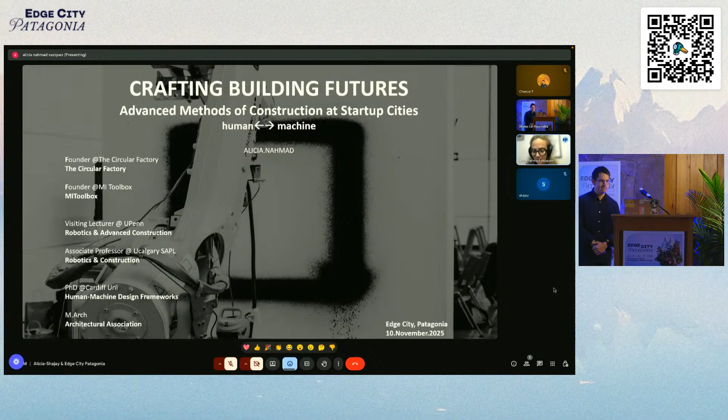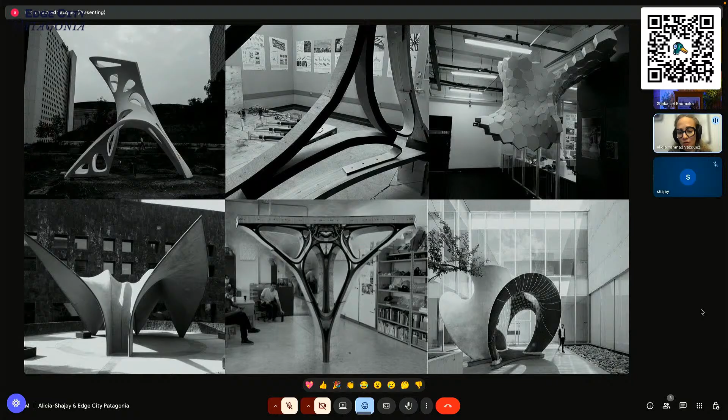Within that context, we built a lot of physical prototypes in Mexico City, but also in Brazil and other countries, currently in Canada. And I started to look into robotic arms.

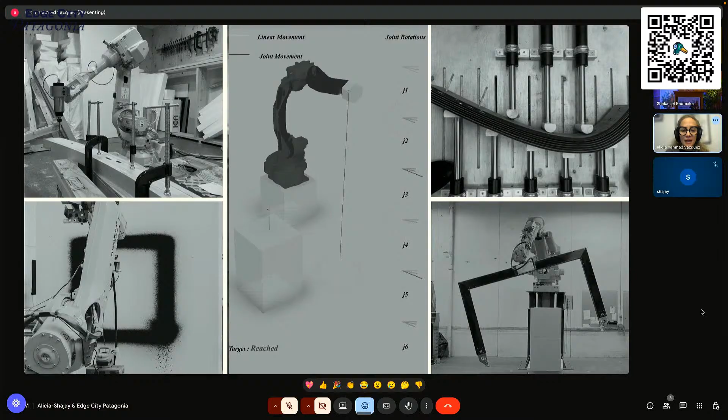I'm a self-trained roboticist, working with robots for the last 15 years, because I realized there was a gap in how we can translate complex, inspiring geometry - beyond just straightforward forms - into real life. There is a lack or missing point between physical and digital, and how we can translate the digital so it can be understandable by humans in physical space. That's when I started to work with robots and robotics.

A lot of the inspiration behind what we're doing is seeing how other industries, like the car industry, change aesthetically - how things look is more related to new looks, modern technologies, and how they are built. Whereas in the built environment, we are just really simplifying a lot. Things look more boring or less interesting than they used to, when actually we know it was as expensive to build before as it is to build now. So what is going on, and how can we close this gap?

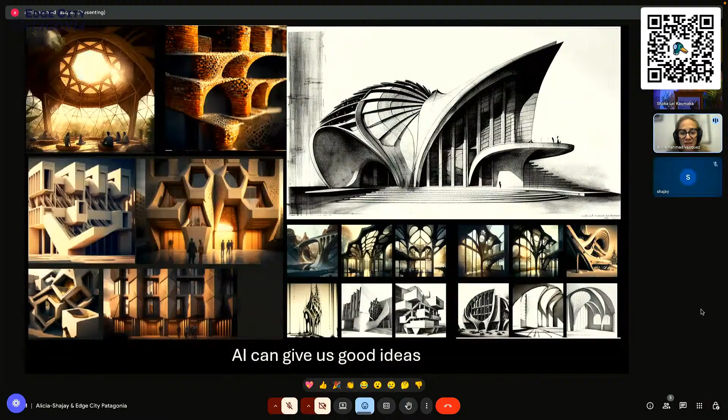We know that AI gives us a lot of great ideas. A lot of AI designs are super inspiring and really nice, but how can we build them, and how can we actually make them happen, especially in decentralized ways?

Our interest in robots is because technology has become a lot more accessible. Robot arms are tools with a very low entry point, but also very flexible - almost like our hand. Whatever tool you can touch with your arm, a robot will be able to do it. As a machine to start in a decentralized way, it's really effective because with the same machine, you can do multiple processes.

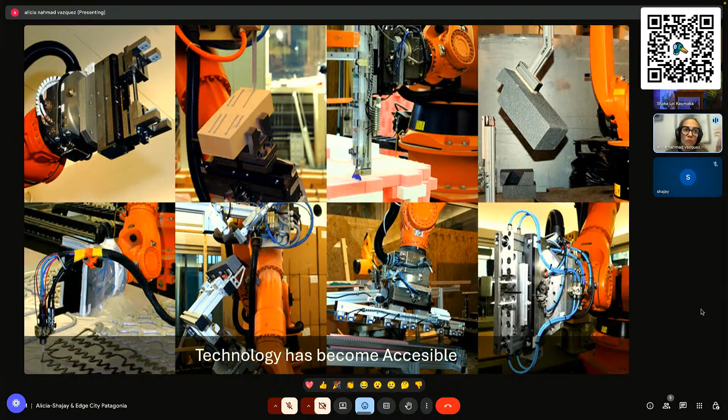That was where really it started to attract us, to say how can we have a manufacturing production based mostly in robot arms as opposed to larger machines. We know that the construction industry for a long time has been looking at DFMA, design for manufacturing and assembly, a paradigm that emerged in the 80s as the future of construction, or something we still consider the future of construction.

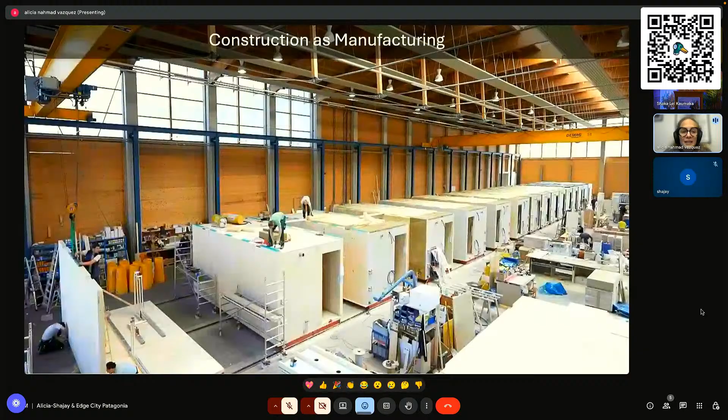In the DFMA paradigm, we are building inside large factories in which buildings are manufactured in series and then transported on site to different sites. However, this represents many challenges.

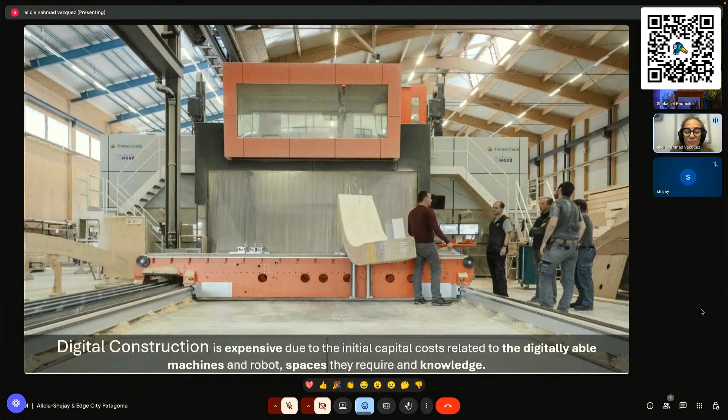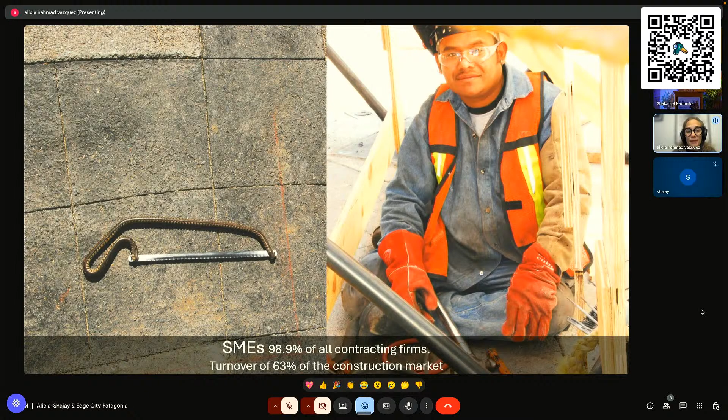Mainly the challenges that we need these large machines that require very large spaces, production facilities that are not like how construction normally works, also require large capital investment. The skills for a person to work in manufacturing are very different from the skills for a person that works in construction, which means construction skills are getting lost, and we're trying to find people that work in a totally different space. So the SMEs, all the traditional crafts, all the traditional construction skills get lost in the translation, while our buildings also lose a lot of what makes them unique and custom.

So we started to work on this paradigm and say, how can we move into a paradigm of design for robot factoring, where we can have flexible robotic cells that can robot factor high quality products in a more human compatible, decentralized way. That's how we started to work in this area.

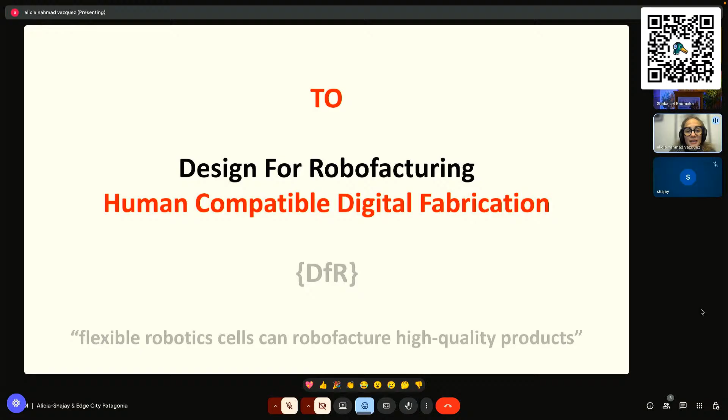How we started to get really interested in seeing, okay, do we have these big machines, can we actually bring them on site? Can we bring them near site in a more decentralized cell that could exist outside the large idea of the factory? And actually, when we think about it, buildings are not normally transported around the same way that cars are.

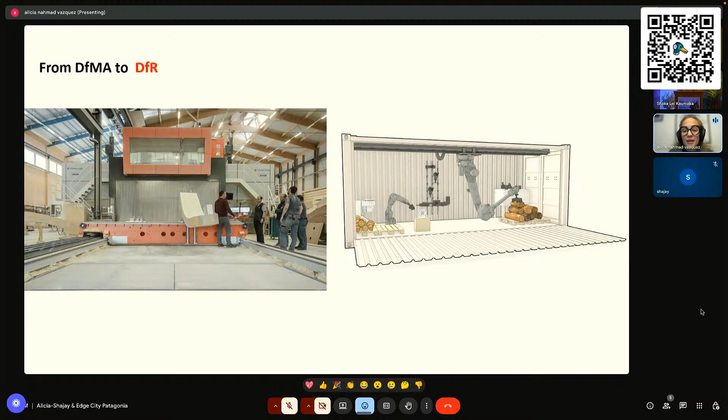Buildings are built where they are, right? So can these factories be near site where they're being produced, and also where maybe the skill sets are, the carpenters, the architects, the engineers, but also the tradespeople, and also the materials.

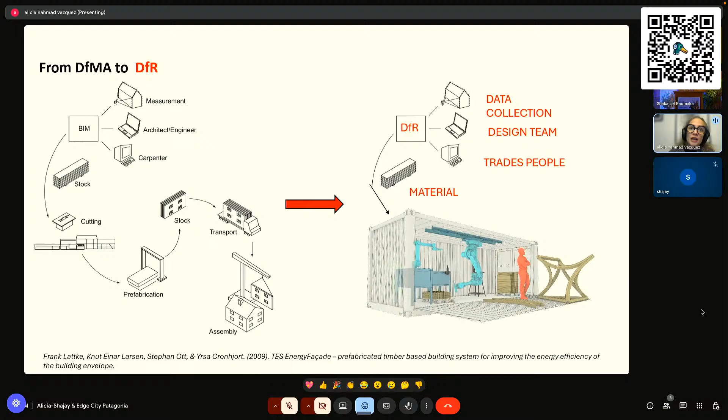When we think about prefabricated design on factories, we require very established centralized supply chains that require just-in-time manufacturing, whereas normal construction will use materials that are on site, whatever you find, whatever species, whatever product. So how can we bring the advantages of digital fabrication, of precision manufacturing to our on-site context, and of course engage with local economies and local trades?

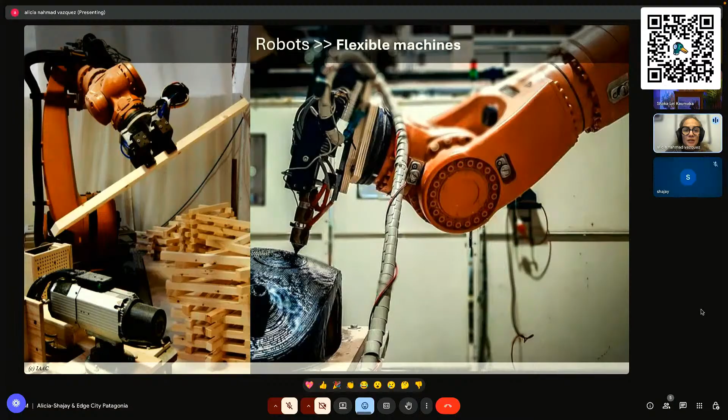We started to work on this project more than 10 years ago, and of course the centralized idea is using robots as a flexible machine that could bring everything together. We also developed these cyber-physical platforms, trying to think about how design for robofacturing should also be able to engage with user choice.

So for example, this is some of the initial tests we did for a simple facade. How can we make it into an environment where there are many choices, where it could be customized, but also where the user can be receiving feedback on energy, radiation, sky view, exposure, material use, material cost, manufacturing times, the same as when you buy something on the supermarket, you can see the nutritional contents.

So can we see the label of the structure of our design decisions? How much do they actually cost in materials, in manufacturing, in time, and also energy, mass, etc.

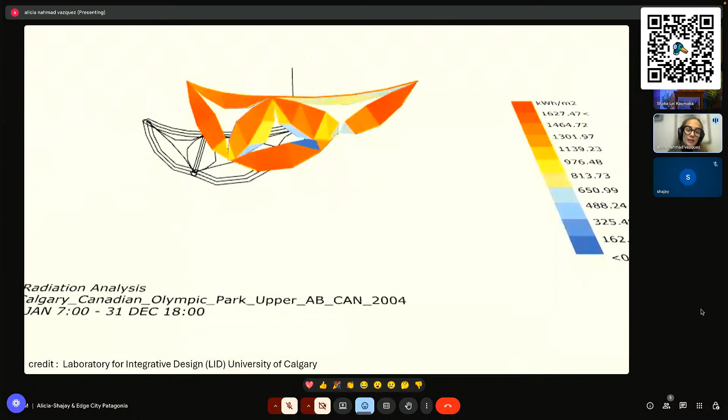Of course, we develop all the backend for this platform where all the calculations get made, to be communicated in real time as the user makes choices. So we started to develop these kinds of platforms that could enable more transparency between the stakeholders and a more participatory way into how things are designed, decisions made by customers, by investors, by stakeholders, and also brought to the production floor into the microfactory.

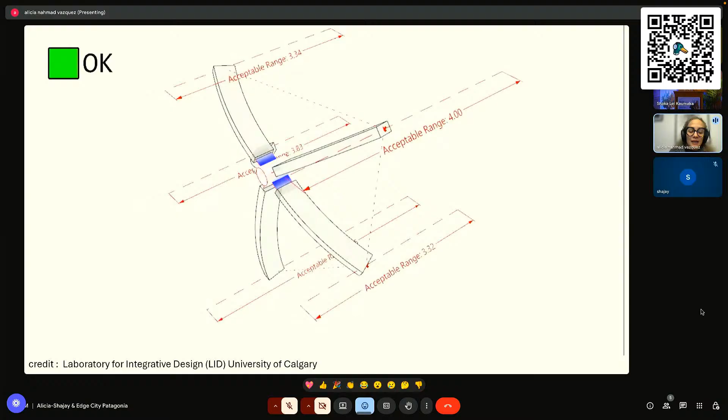And then this is some prototypes built using this platform. We also looked at machine learning, into how we can start to understand materials that may be heterogeneous, how to use these platforms to understand where there are knots, where the wood has imperfections, especially when looking at local supply chains where materials may not be as processed or advanced as more established production lines. So how can we set our templates, how can we produce things to be sure that we don't have inconsistencies, any milling problems, any manufacturing problems.

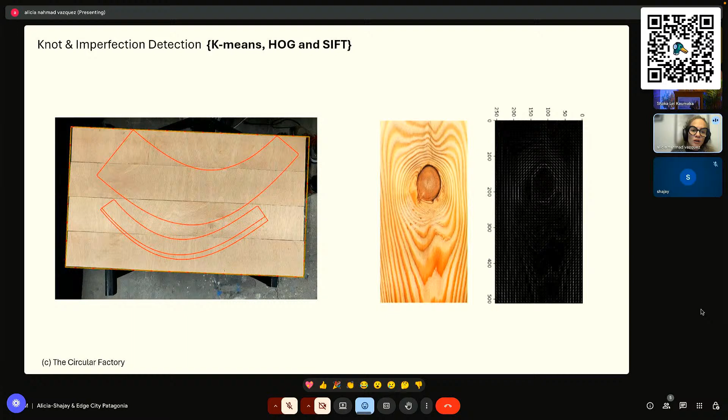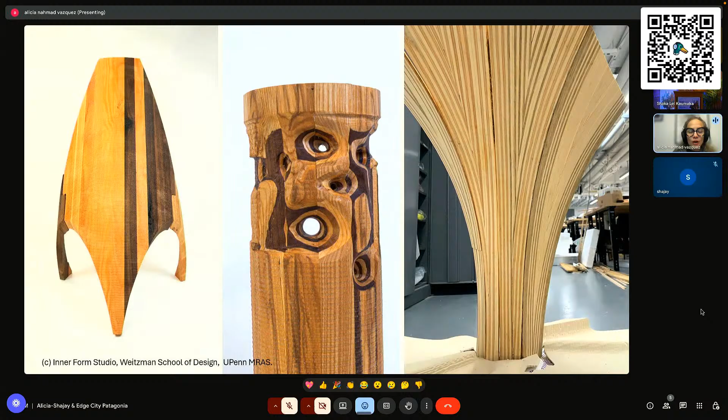So we're also using that to train our own neural nets to know how to mill when material is not so perfect, or when we're adapting to local materials. These are some of those ideas of using different materials, and also using these tools for milling and producing high ambition, sophisticated architecture.

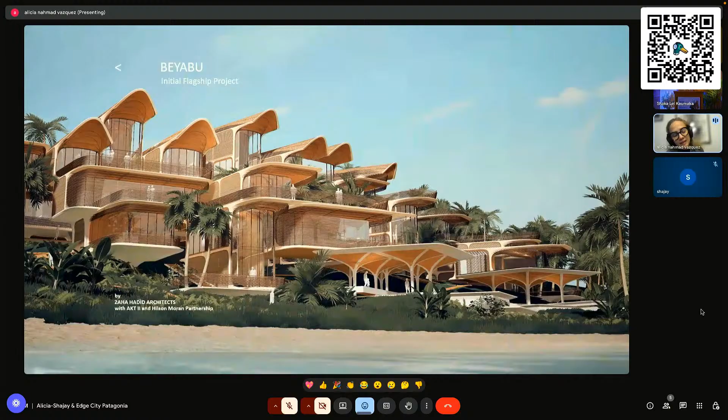So the idea was to leverage technology to create a sophisticated, dynamic, and customizable process, and also use technology as a tool of social innovation to bring manufacturing and production skills into local trades and local workers. The beginnings of Circular Factory was based on the Beyabu project by Zaha Hadid Architects, which is going to be built in Prospera.

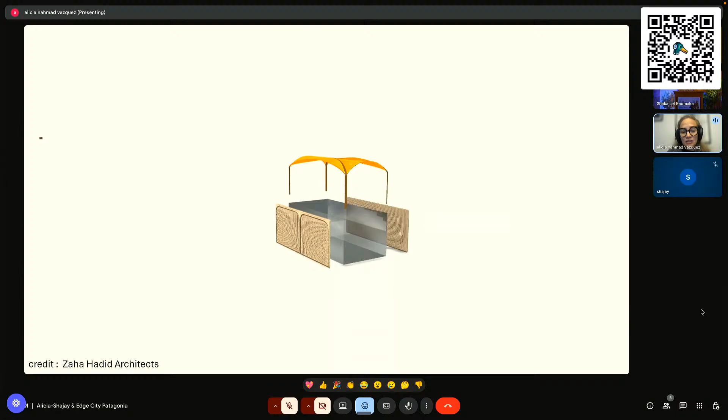Some of the characteristics of this project, other than being really beautiful, is that it enables a large amount of customization - every user can customize their unit. And this, being designed by Zaha Hadid, has really custom shapes that are inspirational, but also very ambitious and really complex to produce.

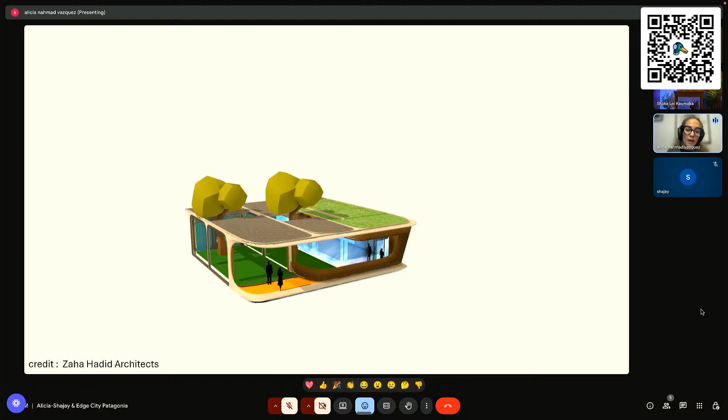So we designed the Circular Factory with the idea of having a flexible unit that could create all of these different pieces in a customizable, flexible way without requiring high investment or more machines, but being able to have everything in a consolidated and compact footprint. This is the ginormous and really exciting kit of parts that the project has for the different customers and buyers.

Based on that, we started to set up with a local certified forest, really looking at the raw materials we find, and with all the international experience and detailed information we bring, establish this micro factory to create a kit of parts and to nearshore the fabrication.

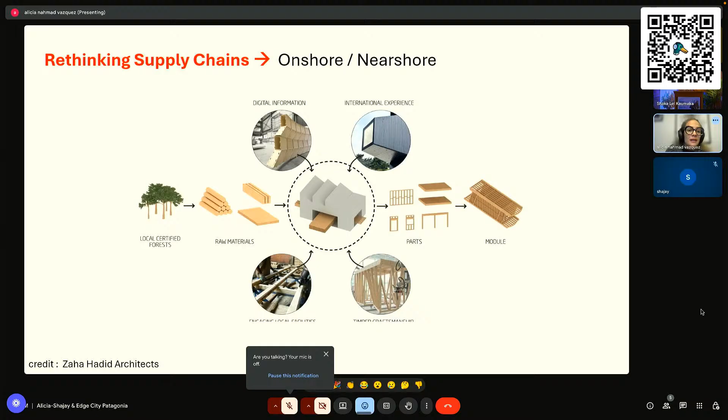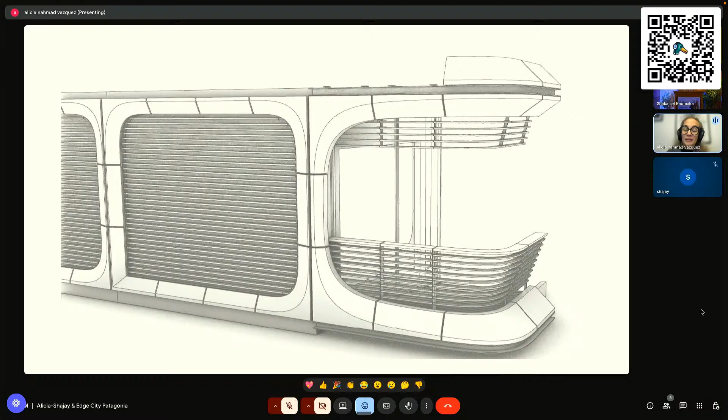We looked at the project and started considering different factors - existing cranes, telehandlers on site, not only fabrication but all the existing tools already there. We know we don't have access to high cranes, so we made all the sizes and dimensions of the pieces adapted to the local economy where they're produced, so they could also be moved on site. So from the mega factory to the micro factory on site or near site.

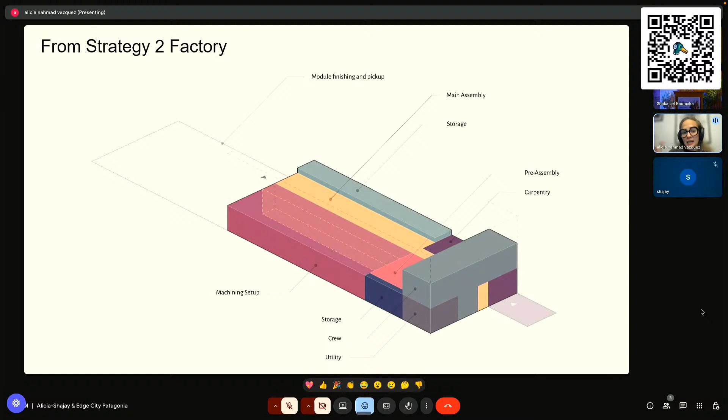So we designed this factory with a really compact footprint. If any of you have been to Prospera, you've seen it - where we have all the machines, the storage, the carpentry areas, and the module finishing, pickup, and main assembly.

The core of the factory are 2 robot arms on a track, which enable us to produce large beams and also smaller sizes, everything based not on the dimensions of the factory, but on what could be transported on site with the local telehandlers, which are basically small machines - they cannot carry more than 2 tons. So we know we cannot have any component heavier than that, compared to larger factories.

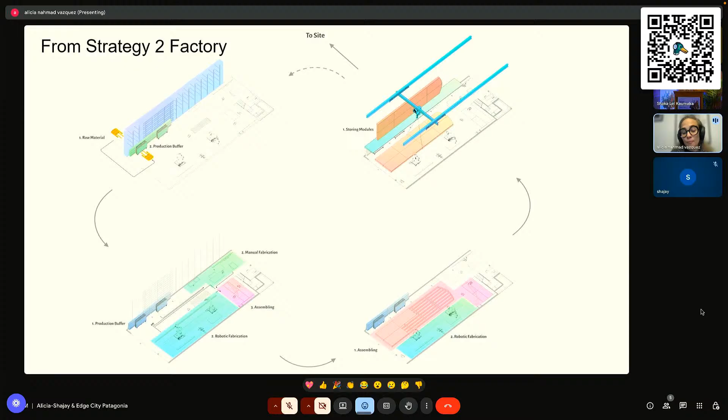We also have scanning and machine learning to understand the deviations between the digital and physical pieces. All of our wood is sourced on site or near site - all of it is Honduran timber - and we keep all of our staff updated with their simulation files and all of the different processes.

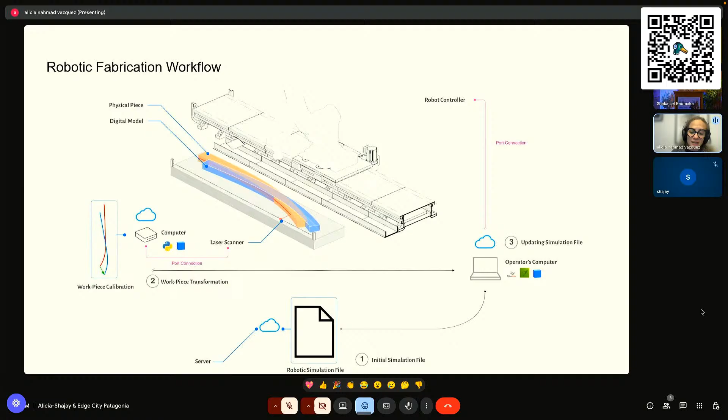So we developed this digital workflow that goes from design, to management, to fabrication. Everything is transparent - the idea is that every stakeholder can access the platform, see what's going on, and see the different processes happening throughout production, as well as all of our factory staff.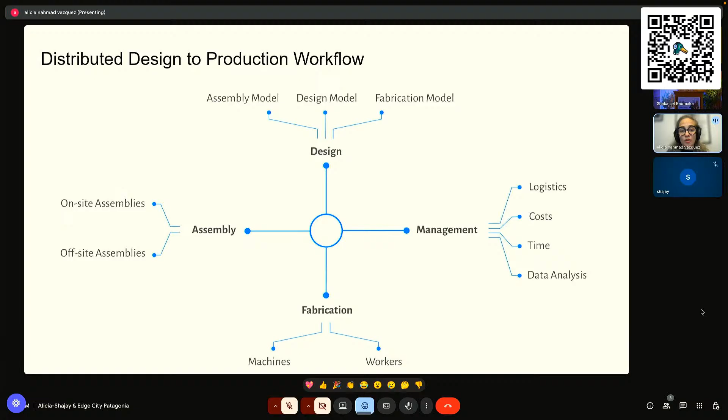Everything, all the machines, are linked together and integrated in the software platform. From the early design, everything gets transferred into the microfactory. Our staff have tablets where they can access what they are going to pre-produce. If there are any errors or mistakes on the files, we can constantly update and look at what is going on. That's how we started from this design.

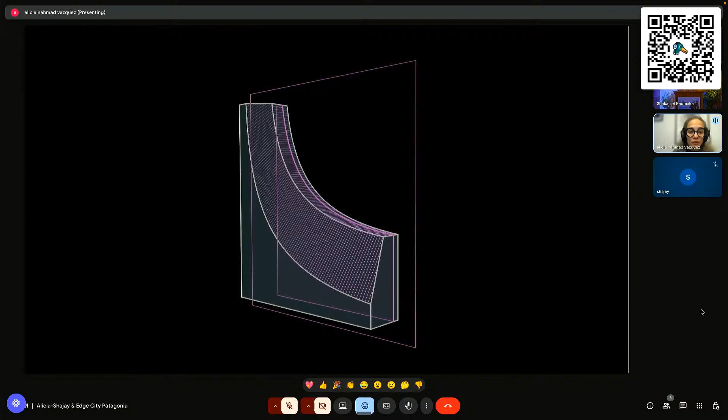This is the design from the architects, for example the mesh that we received. Now through our digital platform, we divide these into pieces that could be transported on site or made on site. Each of these pieces has a different fabrication process depending on the grain direction, what kind of wood is used, and how the lamination will be done. This project uses timber, a local timber, and each piece has a different fabrication process.

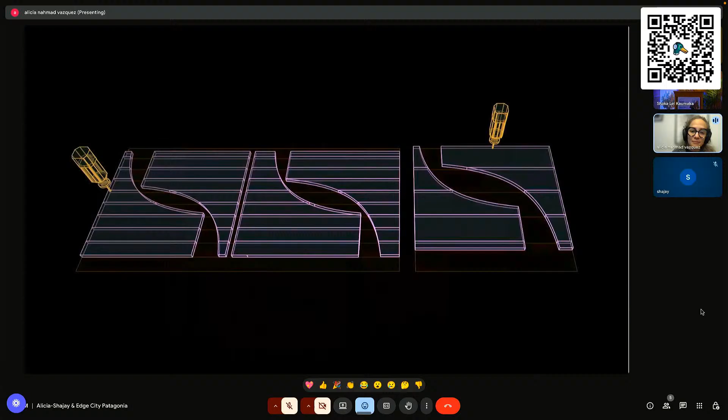In this case, they first get cut on a CNC machine, a numerical machine. Then they get cut, laminated, and assembled again, and finally milled with the robot arms. So each piece has its own process, and all of this is controlled throughout the platform as it gets updated and as the process gets fabricated.

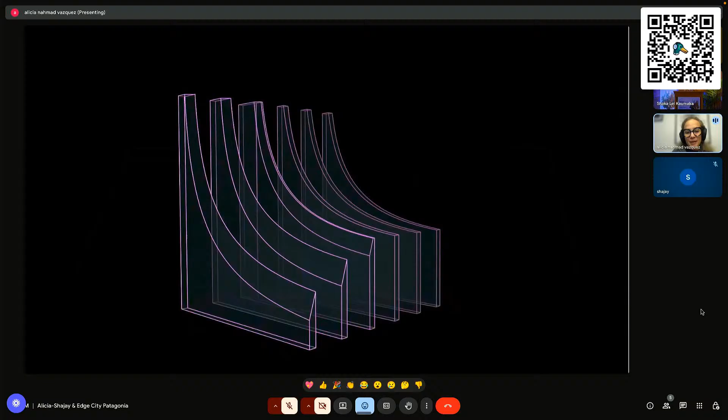Here is the second lamination process before the final robotic milling to get that shape, while also looking for material efficiencies, material saving, and the best nesting process for each of these complex geometry pieces.

The platform has all the different machines that we have on the shop, so all of our different stations where the personnel and management can access to see what is the bill of materials, what stock they need, how much they need, what they're going to be producing today, and we can constantly update on what has been produced, where there were errors, and where things are being changed.

For example, we can also access a bill of materials from very early on, to see where that piece is, where on the project it goes, to which unit it corresponds, and what are the different materials—not only wood but also adhesive, brackets, dowels—and then the different processes.

We know that this piece will require work from the planer, the jointer, then lamination, and not only machine time but also human time and unsupervised time, which corresponds to gluing or whenever it is drying, and wherever there are errors in the process.

So we developed this platform with an aim of flexibility and also of providing maximum transparency throughout the fabrication process for every single piece, across all of our different machines on the microfactory, where you can see where the piece is in the process, whether it is finished, how much is missing, where there were any errors, and what the different schedules are. So that's our digital platform.

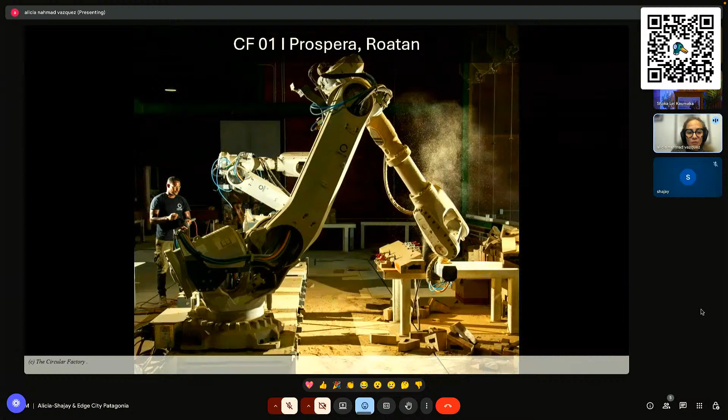And this is how the physical factory is in Roatan. We have the two robot arms—that's Jaime, one of our master carpenters—and also the two CNC machines, a planer, a jointer, and all of the other more traditional carpentry machines that you will find.

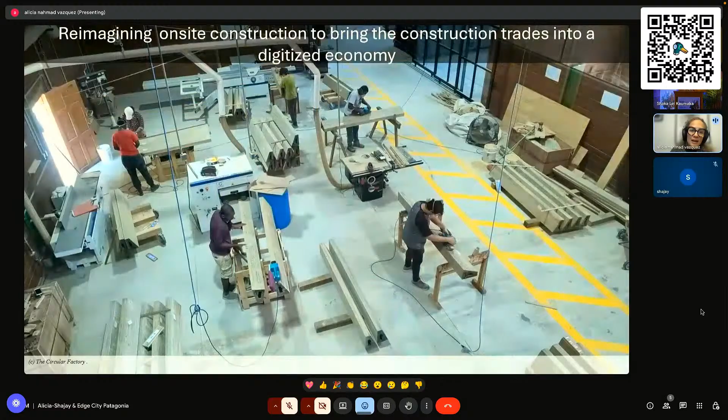Right now we have upskilled more than 22 local workers who have become aware of how to use robotics and digital processes, potentially bringing all the trades into this digitized economy, making them active participants of digital tools and digital processes, and excited about what they are doing.

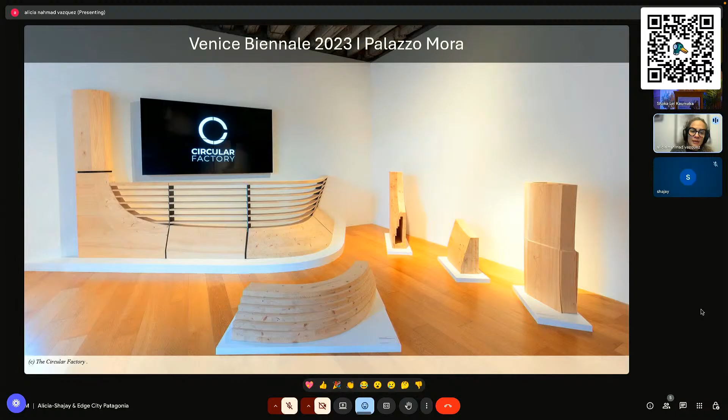We fabricated part of that Beyabu project for the Venice Biennale in 2023, which was exhibited there at the Palazzo Mora. And these are the pieces right now at the Zaha Hadid Gallery in London exhibited.

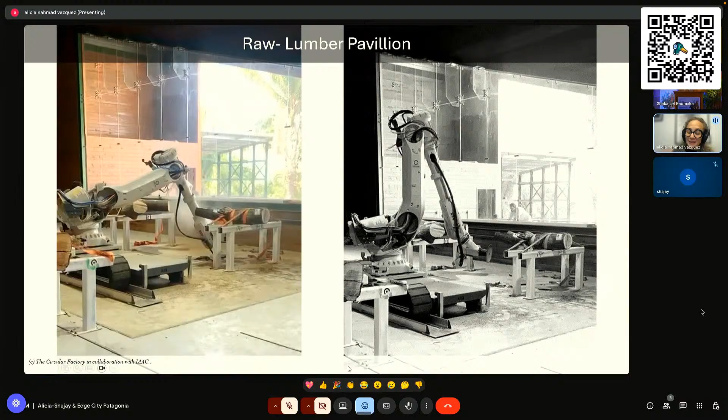We also have used the same setup to look at raw material, like raw lumber, for example in this pavilion. Using the same setup and the same digital platform, we tried to go one layer deeper to look at the local lumber—how can the local lumber be used without any pre-processing being done?

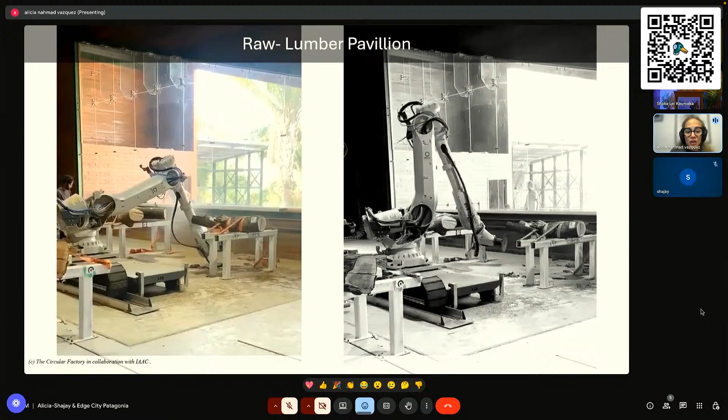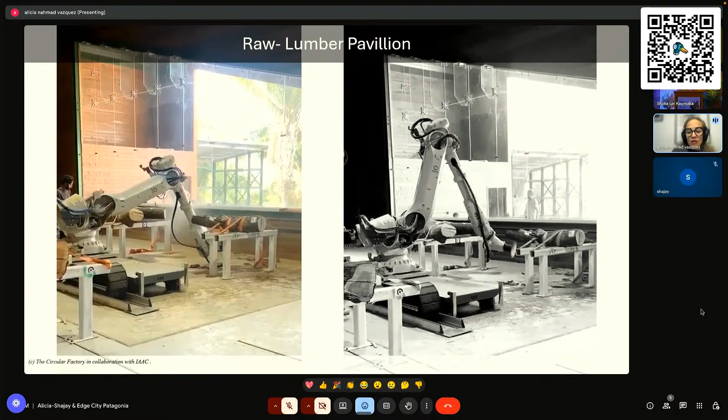So we actually scanned the logs and then used them to process with the same robot, which in this case has a circular blade as well as the milling spindle—same machine, a lot of different processes. This was a raw lumber pavilion that is also outside the Vita building in Prospera. Here you can see this all using logs.

Also, like this on the Duna Tower, we fabricated all the louvers for the tower.

With the same setup, you can see the same platform, but a different project. So really the main ambition was this flexibility, not only a single process.

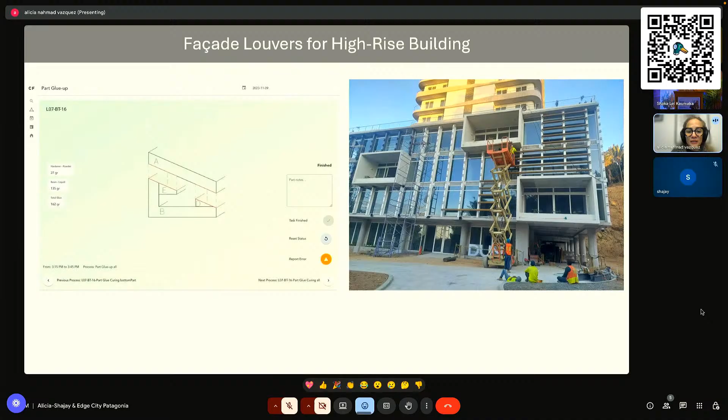Right now we are doing these Tierra Zen cabins. We have fabricated one. They are glamping cabins, going to be on the Veta Village—single 50 square meter dwellings with one bedroom, bathroom, a little study nook, and a kitchen. They are all done in local, raw timber.

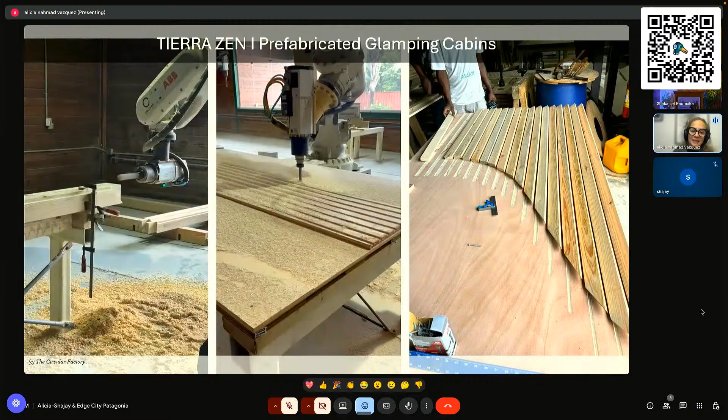Again, similar to before, the facade is all louvers that start to open up to show the different processes. Here the robot is milling not only the internal frames—everything is frames—but also all of the exterior pieces that create the facade.

So these are the glamping cabins, and these are all the different frame panels. Everything is a timber system assembled on site. As I mentioned, these are the machines that we have there.

All got assembled on site, prefabricated. It all fits in a single container, so it's transported to the site. This is near the beach, near the Pristine Bay.

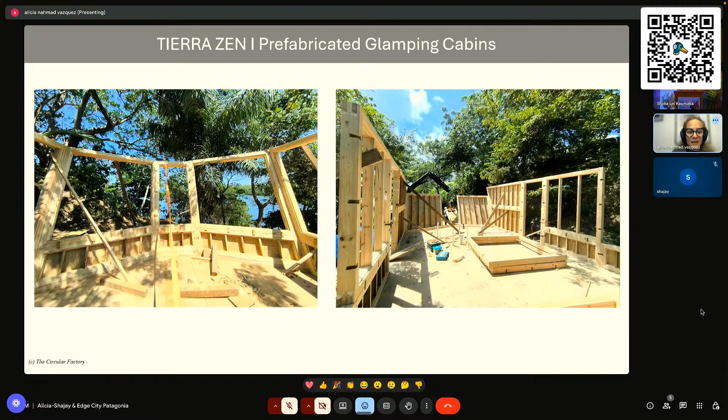And then this is the finalized cabin that we are doing now. So the setup on the factory is now into these. These are some photos of the interiors of the Tierra Zen cabins.

Basically, the idea is to create this decentralized, distributed, democratic fabrication through a flexible and adaptable microfactory with software that enables stakeholder participation, and also micro-credentialing, upskilling, and training the locals. Yeah, thank you very much.

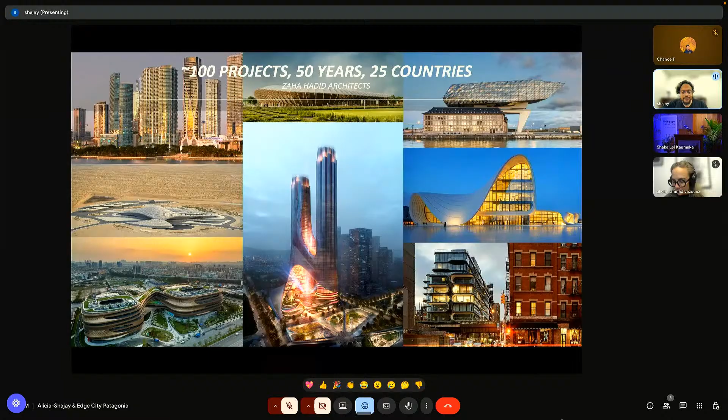So I work for the design research team, which I co-founded almost 20 years ago at Zaha Hadid Architects. The company is obviously known for these more high-tech buildings globally, and it's about 50 years old, but we have operated in every possible economy as it was emerging—whether it's the Middle East, China, or now India and so on.

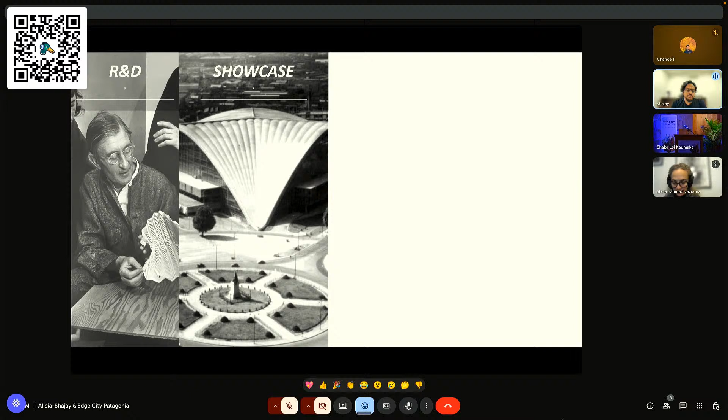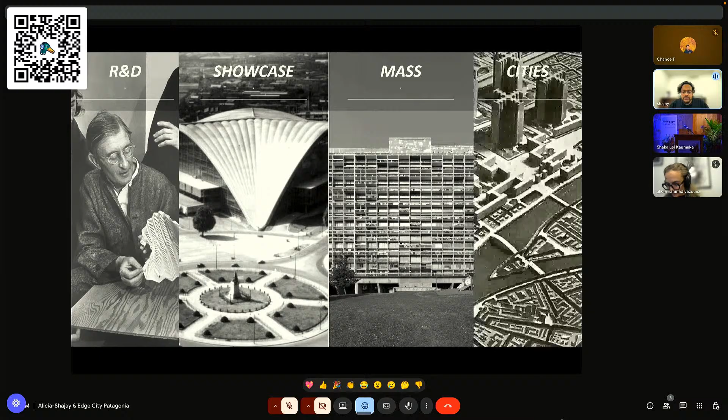So in that sense, we have been following in the footsteps of the Bauhaus. That's what I'm going to talk about—not the architecture of the company, but the efforts in scaling up design-led ideas. Bauhaus was a short-lived but deeply impactful art and architecture movement between the two wars, where they explored new forms of knowledge and making, to postulate a new architecture on that basis, which led to a prolific number of new buildings being built after the Second World War, especially in Europe and North America, and which then led to deep impact on our everyday buildings—so-called commodity buildings—globally, and how 20th century cities took shape.

So we want to follow in a similar footstep, but not repeat the mistakes of the 20th century—to learn from the positive things they did, which was focus on research and development and demonstration, and then later help percolate those innovations and technologies deeper into the industry and into everyday buildings and cities. As many of you know, venture capital in the architecture industry is almost non-existent.

So all innovation is in a way funded by these kind of iconic projects. That's not only true for the 20th century, but also historically, cathedrals were the engines of innovation in Renaissance Europe, and similarly temples and other religious buildings in other parts of the world.

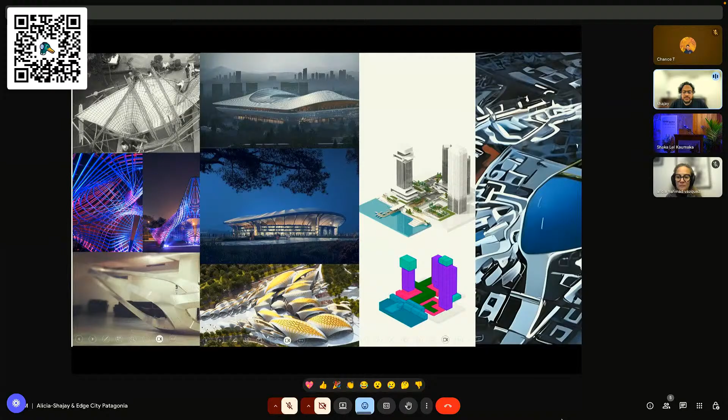So all of this, in the last 50 years, we've been exploring technological counterparts to this architectural and urban ambition. And we have seen 4 specific kinds of episodes. One relates to computational geometry, how we can digitally design shapes on the computer, and how we can then produce them physically using digital means.

And later we've been looking at so-called video games, or game theoretic games, for consensus building among stakeholders, which we are now also investigating how that leads further on to so-called AI for new cities. So today I'm going to talk only about point 3, which is use of games for consensus building, or participatory architecture and participatory design.

But just a bit of a precursor - why are we interested in cities? As an architect, as a designer, as an urbanist, it's deeply rewarding to see that the outcome of our profession can really help civilizations blossom and deeply impact all the citizens of the world.

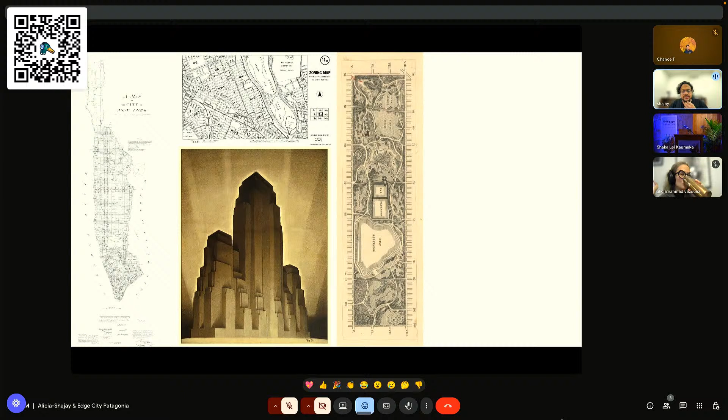And then most importantly, they designed these kinds of templates for building types, whether it's skyscrapers or the 6 or 7 residential building types that they had pre-approved, which are now dotted all over New York. And so the gridiron system of New York also makes real estate development really, really easy.

Because the plots are fungible, these designs are equally applicable on the east side or the west side, because the plots are almost identical. So developers don't have to get new permissions every time. These were some of the reasons why New York really figured it out, and these integrations between urban planning, urban design, and architectural design led to a lot of prosperity in a short time.

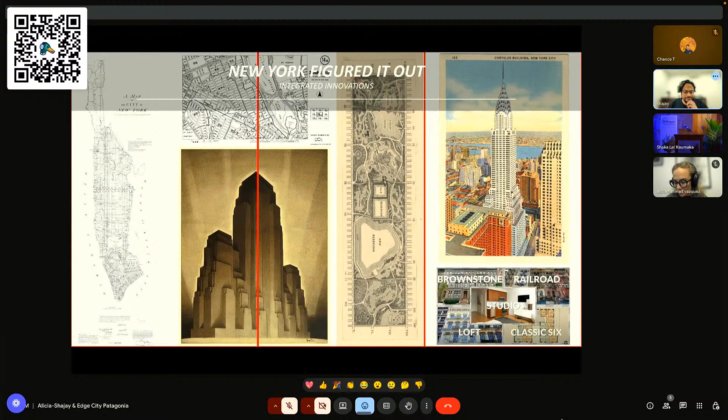So that's what we think - cities are a more recent architectural invention, cities that grow that rapidly. And since then, the US has not tried it again, but China has definitely copied a lot of successes from the United States, leading to over 100 cities in a matter of 50 years, between 1980 till now - Shenzhen being one of the most important examples of that.

And so this architectural invention, in a way, can deeply affect citizens of the world. Cities, as we know, cover only 1% of the surface area of the Earth, account for 80% of the wealth and 70% of the pollution and so on. So it is very challenging, and it can be deeply rewarding as well.

So that's why we are very motivated in this kind of integrated system development. So games for consensus falls under that, because we've been working collaboratively with architects and engineers and scientists and so on for the other aspects. But one of the things that deeply interests me is ideas of games, game theoretic setups for consensus building or incentive mechanisms and so on.

This was early on explored by Patrick Schumacher, who's a principal at Zaha Hadid Architects, in the year around 2000.

There was a postgraduate design student-led team called RAMTV that released a book called Negotiate My Boundary. Two things they spoke about in this book were deeply impactful to what Alicia and I tried since 2016. One aspect was online community building, well before Facebook or any such thing existed, when people figured out the internet could help bring communities together and find synergies between people and their interests, then potentially physically host them through technologies of mass customization like modular construction.

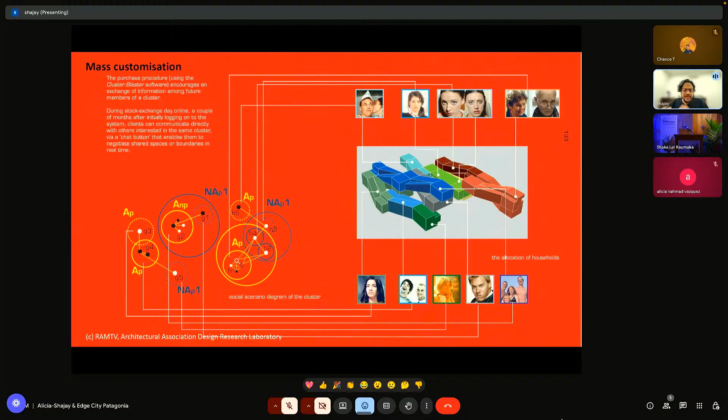So these two aspects, combining online community formation with corresponding physical hosting on land, were what Alicia and I picked up in our teaching activities at the Architectural Association in London since 2016, titled Constructing Social Agency.

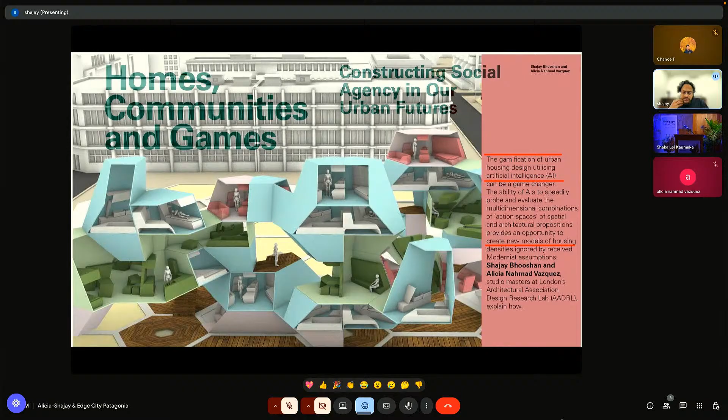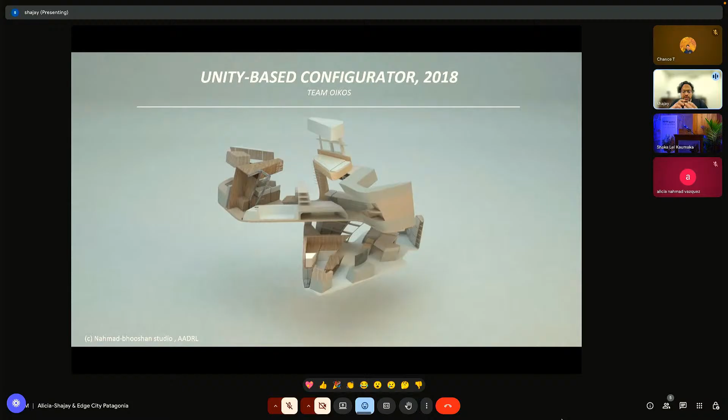We started leveraging emerging technologies of video games to help non-architects and non-designers visualize the possibilities of combinations of spaces, and how we can create communities and give them what they want, rather than them buying things and figuring out the building as built is not what they originally intended.

Since then, we've been thinking about these configurator systems for configuring spaces in a collaborative, community-led way.

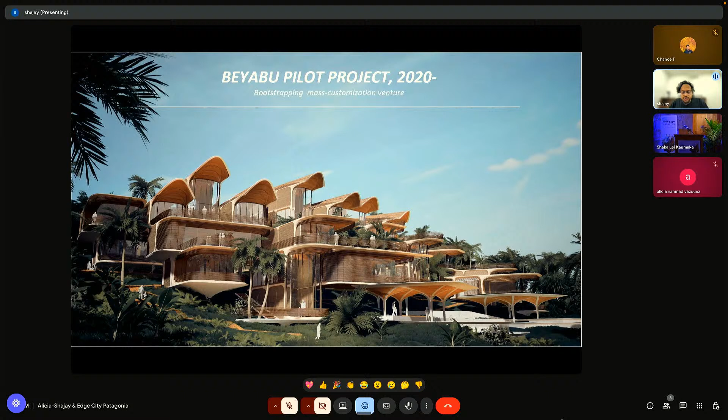This is the context in which we arrived at the Beyabu pilot project in Roatan, where we proposed as Zaha Hadid Architects this kind of modular design, but still customized to individual occupants. The red dot is the pilot cluster, but the intention was to demonstrate through that pilot cluster all these technologies, and if successfully demonstrated, we could plan out the rest of the development.

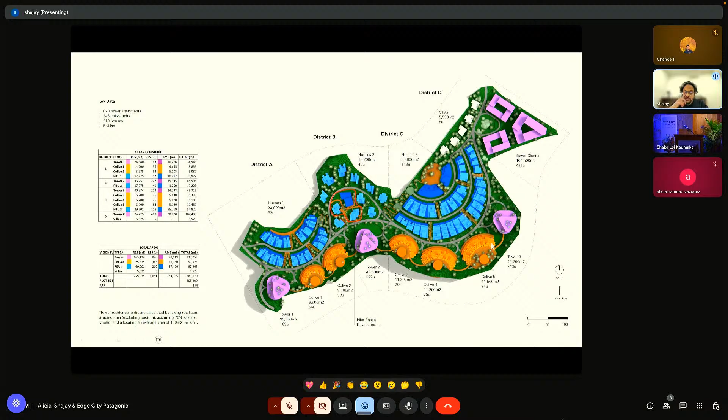We proposed two separate technologies in this online-to-on-land tech stack: one was the configurator, the other was Circular Factory. We built the configurator internal to ZHA, and Circular Factory was commissioned by the client, and Alicia has since taken it forward.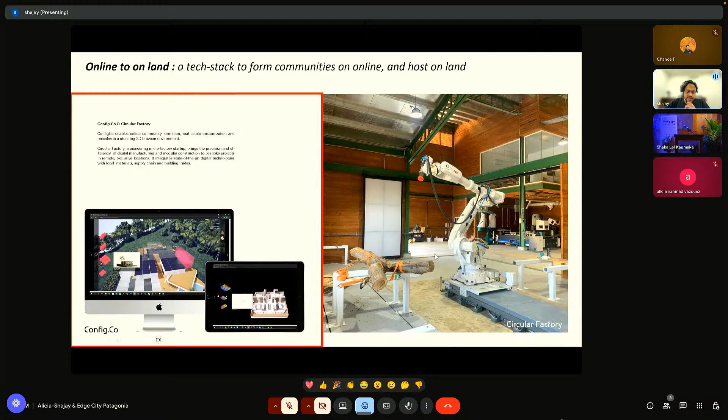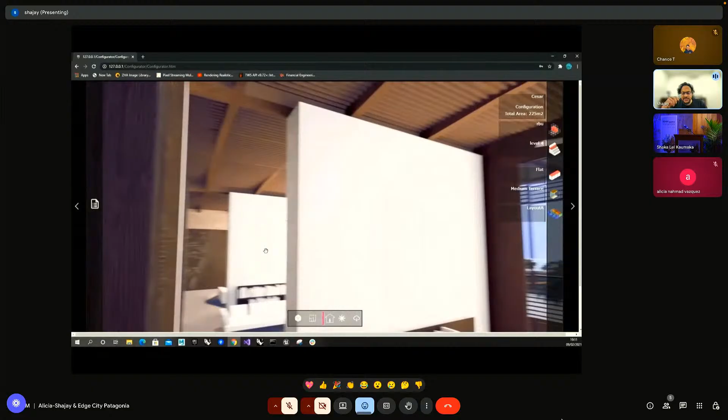On the configurator side, we built a game engine based configurator where people could log in on the browser, select their site, pieces of land in 3D, and later customize the interior layout of the building, like a 2-bedroom, 3-bedroom, or office space. They could also walk around in real time and see what they can see from inside their house, how much of the ocean they can see, who their neighbors are, and so on.

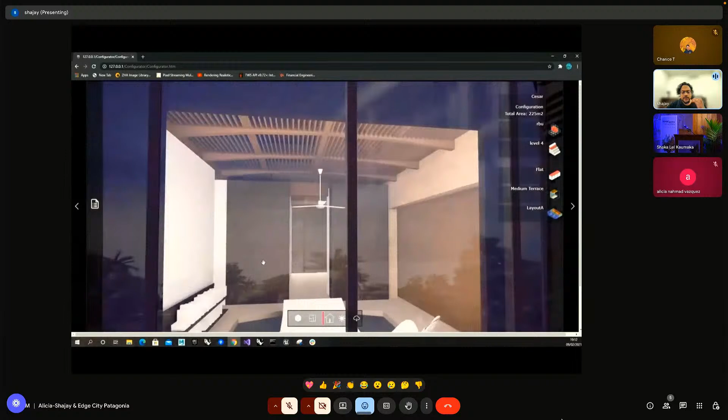This was very well received by non-architect buyers and eventual occupants of the building, and this was well before anything was built on site. Currently this has not been built, even though it has been designed and engineered to a great amount of detail.

Behind the scenes there were ideas of 3D rights, coming from Air Rights in New York but extended to 3D, where users only pick these pixels or 3D pixels, and we behind the scenes compute these design options. Based on their budget, users pick 3 pixels or 6 pixels or 3 corner pixels and half pixels on the outside, and so on, and we compute these spatial modules and combinations.

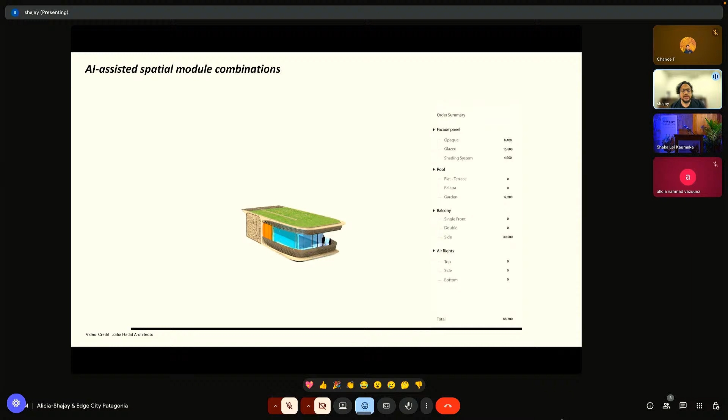This is enabled by a system of combinatorial possibilities. We designed and tested how these kit parts can be combined to create interest and variety, so it's not all cookie cutter the same, but at the same time it can benefit from economies of scale, similar to other modular construction. So it has the benefits of customization and the benefits of modularization.

Another benefit of this configurator was that we designed so many types, but most users only chose about 2 types. This meant it became a testing ground for which ones to take forward and detail further, which is what we did after this phase. When we did the configuration with about 16 buyers early on, we realized we only needed to detail further 2 more, and then we detailed the kit of parts accordingly to make sure those 2 types are delivered.

We also detailed how each of those parts can be converted from raw material to finished product, how much time it takes, how much machine time it takes, how much material resource it takes, and how it can be connected deeply with the technologies of Circular Factory and the skilled labor that they were training.

This kind of system integration also delivers a lot of economies. Usually modular buildings are designed as individual units and then stacked together, so there's a lot of redundancy and wastage. Because here we already know who the buyers are going to be and what arrangement they want, we can treat the entire aggregate as one building, optimizing structure, material consumption and energy consumption holistically.

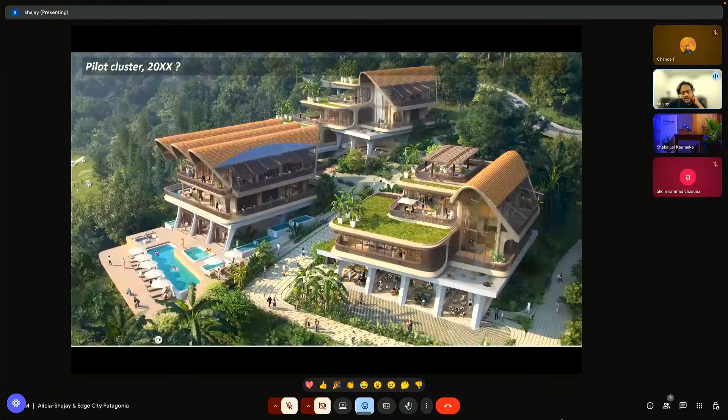This is where we are at. We want to demonstrate this pilot cluster. Hopefully there are enough buyers and funding, and if so, we can export this to other parts of the world, customizing it to local climate and other opportunities, material opportunities and skill opportunities.

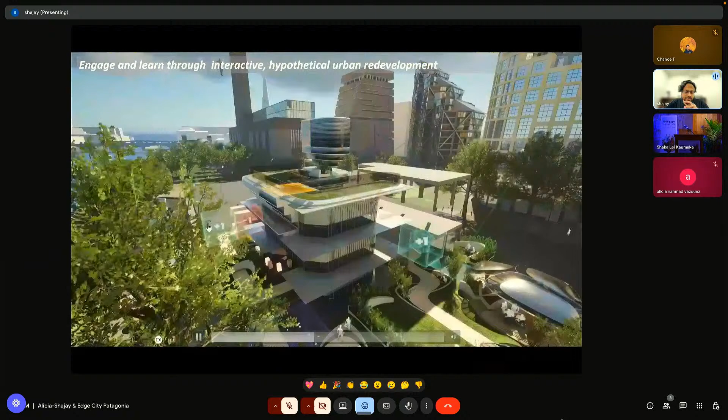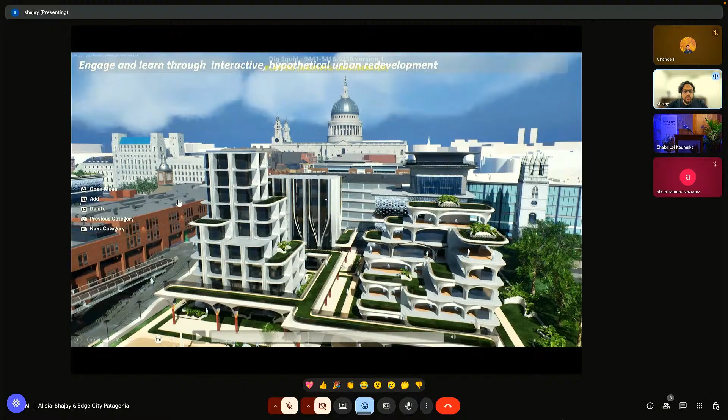We took this idea and extended it into a fun game for Fortnite last year, where we tried real-time configuration with kids as young as 7 years old. Everything built on screen was built by players as young as 7 and sometimes as old as 18, and within 3 to 5 minutes of playing they can create architecturally credible outcomes.

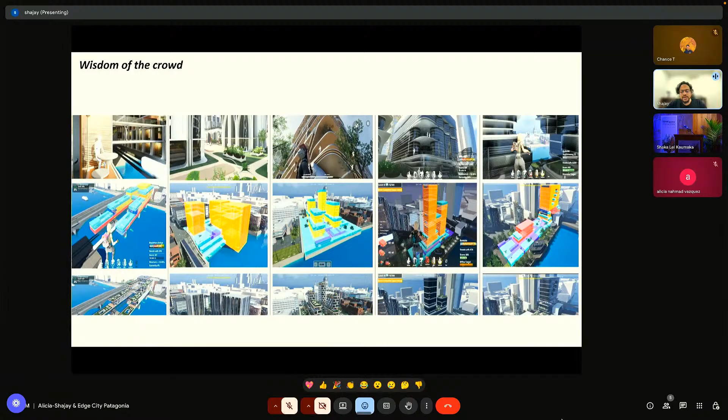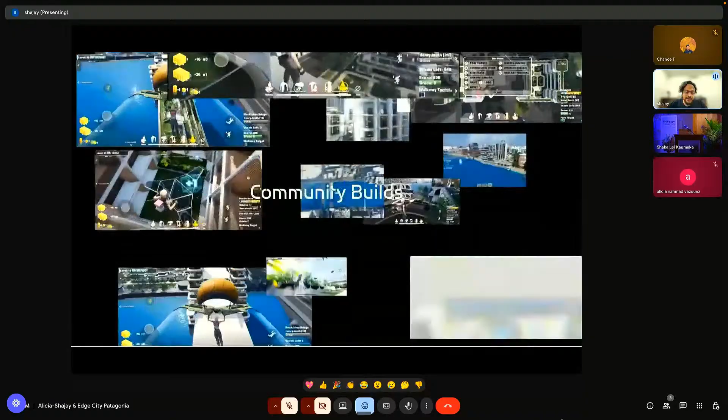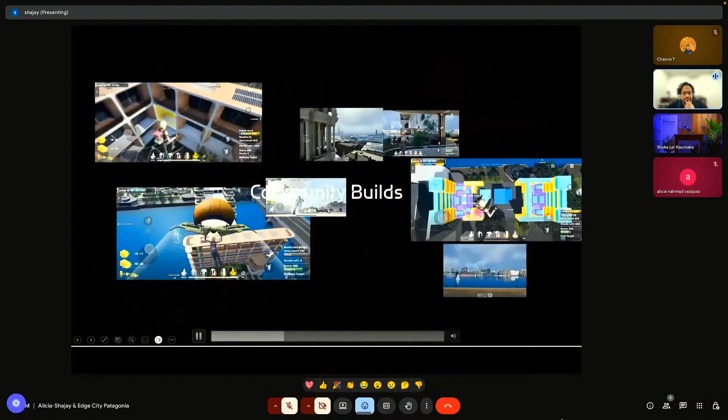At the same time they learn about the trade-offs involved in city building. All of these outcomes are designed collaboratively by kids in a 3 to 4 player game where they have to harmonize resources while building. We watched from behind the scenes and saw players building an amazing number of combinations in 3 to 4 minutes. At peak, in the first week, about 500,000 kids were playing this game, which for a first architectural game in Fortnite was pretty revealing and rewarding for us.

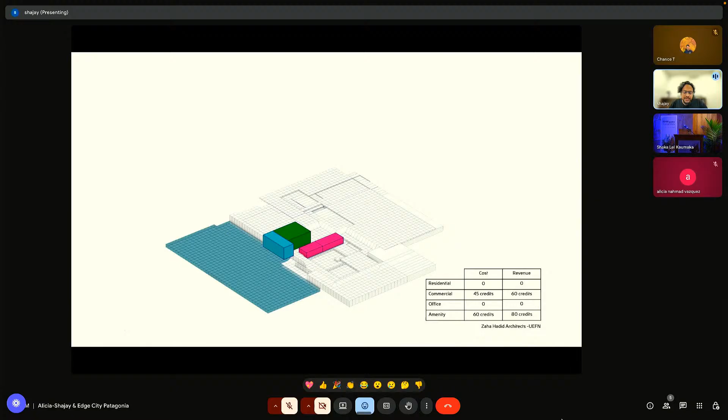So now we're thinking we can use this game as a kind of reinforcement learning environment, where an agent plays the game like Monopoly and figures out what is a win-win situation for both the city and the citizen. In the process, the agent might explore many combinations and translate those into corresponding architectural outcomes, giving a look and feel to each resource outcome.

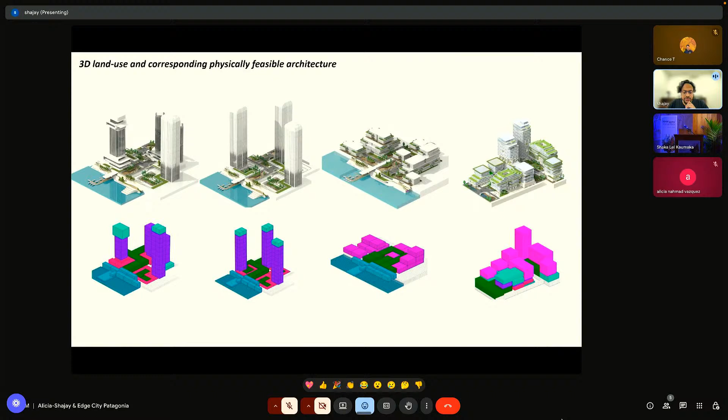I'll leave you with this handcrafted simulation of how such ideas of consensus building can be extended to the scale of a city. Here are 4 players playing a game of how to build out an entire city, a bit like SimCity, but for real, with more realistic constraints, architectural ideas, and construction costs.

I hope that gives a sense of the digital side of building for consensus and designing for consensus, and the opportunities at stake here. Thank you for your attention.